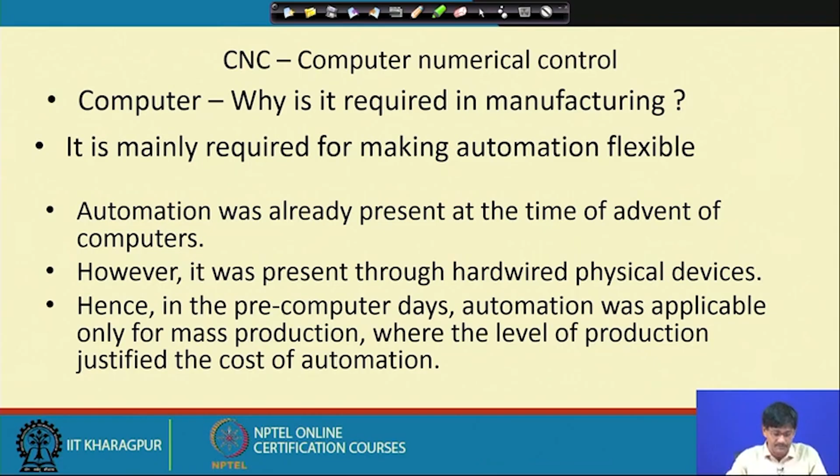Hard automation was restricted to mass production, but computers made it possible to implement automation at lower levels of production, meaning where the number of similar components produced is not very high. In the pre-computer days, automation was applicable only for mass production, where the level of production justified the cost.

Let us move to the next slide, an example of hard automation. This is a physical device called a cam. The cam is rotating and has a non-circular profile, so the changing radius applies a push on this follower, which pushes the cutting tool.

The cutting tool has a straight line linear motion dependent on the rate of change of radius with angle. If this is an Archimedean spiral, the cutting tool gets constant velocity forward motion when given uniform circular motion, meaning omega is constant, so the feed forward motion is at a constant rate.

Once this point comes after rotation, the tool will be rapidly retracted under the effect of this compression spring. This is called the guide, this is the follower, and this is the push rod passing through to the cutting tool, with the cam being the main device for this mechanical, fixed automation control.

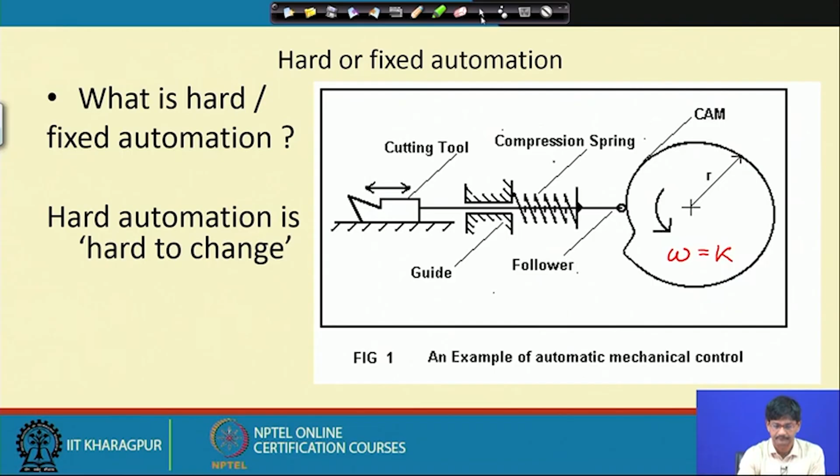So I have tried to just show, movement-wise, how this will look. Let us have a look. Not very accurately shown, but still, something like this. This non-equal radius pushes it out, and suddenly it retracts back very fast when this point comes.

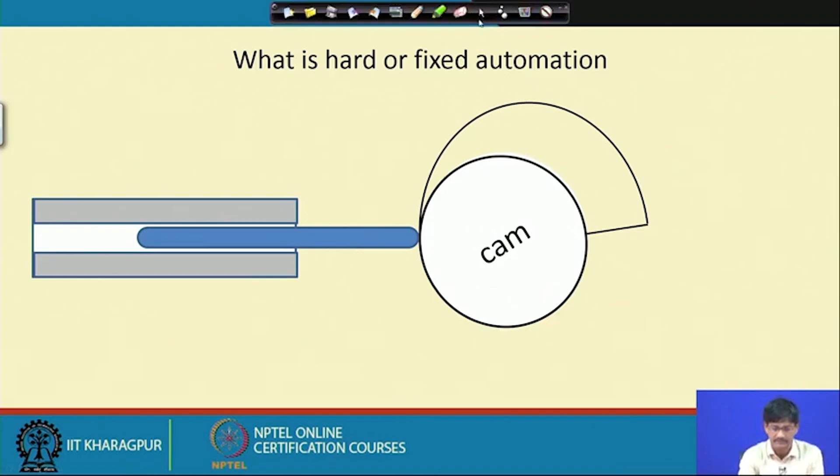So, to proceed, this is an example of what goes inside the CNC machine, and this is an example of point to point control. So I will just write it down here for your reference. Example of point to point, it is called PTP, point to point control.

And this also is in open loop mode. So open loop, I will write here open loop. Example of open loop point to point control in case of a computer numerical control device.

So in these cases, whenever we come across such examples, it is best to identify the prime mover. The prime mover is called something, a stepper motor. What's the property of the stepper motor? The stepper motor is able to move by steps, by angular steps, corresponding to pulses it receives from the pulse generator.

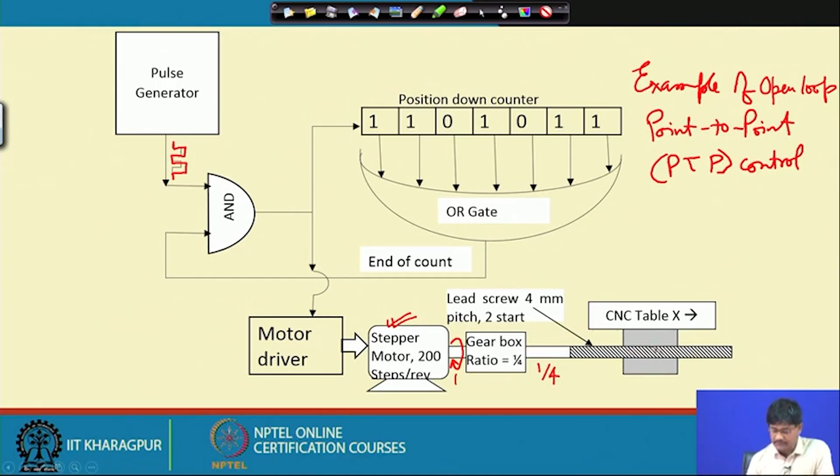This goes round once for 200 such steps. So this goes round and this enters a gearbox with a ratio of 1/4, which means that if this rotates once, this will rotate 1/4. And this lead screw has some pitch, so that this CNC table will be moved forward or backwards depending on the direction of rotation of the lead screw. So this will be moving corresponding to these pulses. So this is the basic control achieved here.

So if I change the frequency of the pulses, the speed of the CNC table will change. If I change the number of pulses going through and ultimately reaching the motor, the extent of motion will be controlled. If I control the sequence, the pattern of pulses coming out from the pulse generator, then this will be either moving this way or that way. So many possibilities of control are there.

Last of all, if I put a number here, this is called a position down counter, it's a digital device. If I put a number inside these slots, and if I take out their extensions and put it through an OR gate, unless and until all of them become zeros, the output of the OR gate will never become zero. So say all of them are zeros at a point in time. So this output will be 0 and it will stop further pulses from coming to the motor.

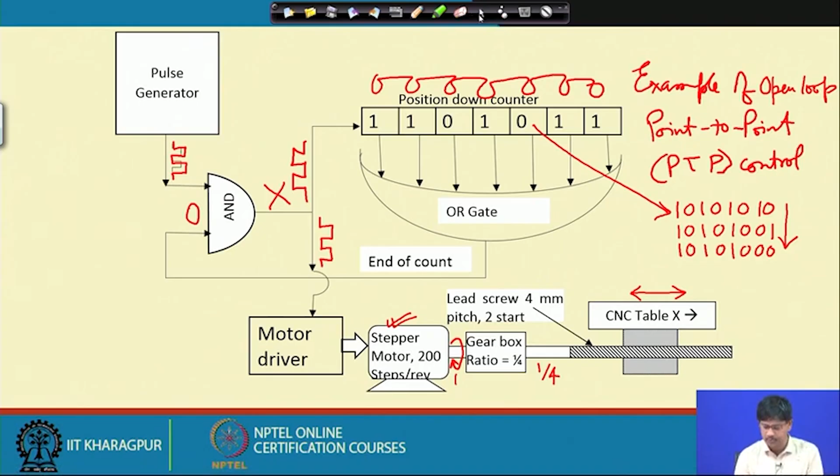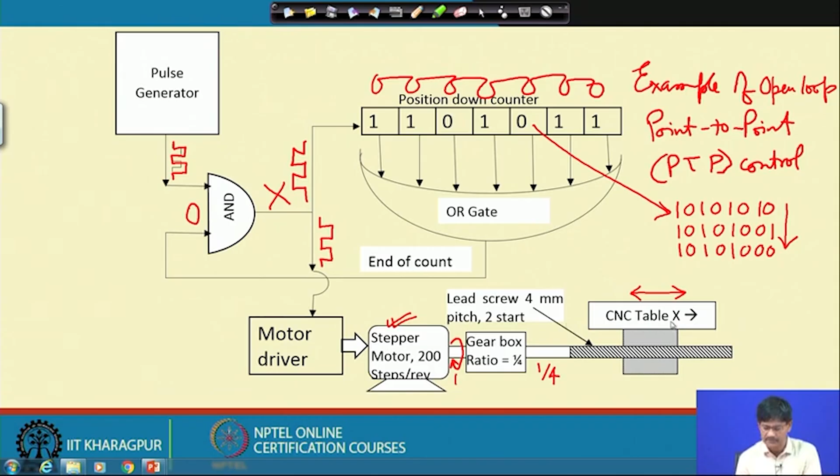So this is called point to point. There is no velocity control as such. Whatever is the pulse generator output frequency, the CNC table accordingly moves with a constant frequency, a constant speed. But why would we want a constant speed? Say you are drilling. If you are drilling, you are putting a job on top of this, and this moves to a particular point and the drill comes here and it makes a hole here like that.

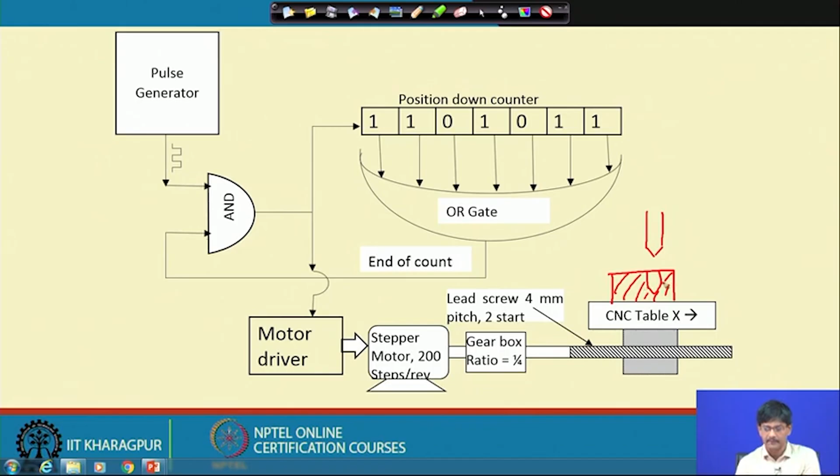When you are drilling, you are really not interested in controlling the speed. You should move at a reasonably high speed and achieve attainment of a particular location where drilling is to take place. So this point to point control is very suitable for drilling, for spot welding, for jig boring, like that.

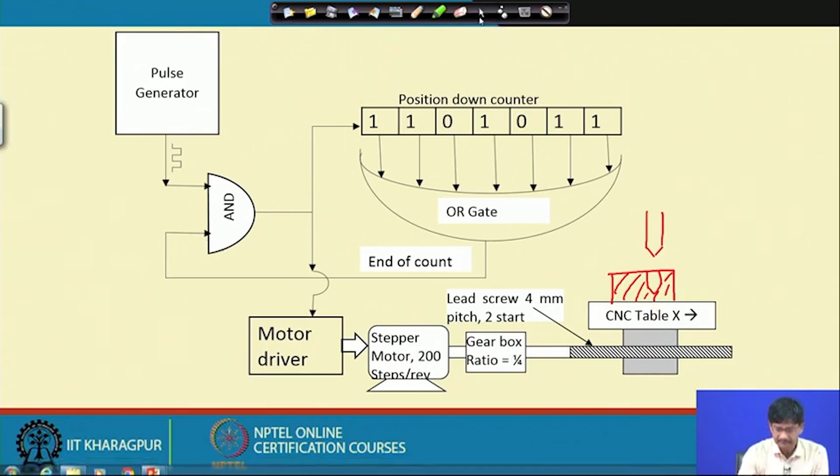Next, this one control is used for a little more sophisticated type of machining operation, that is, say, milling, lathe, like that. So what is this? Let us identify once again the prime mover. Where is the prime mover? Yeah, here it is.

This is the prime mover, the motor. Here maybe it is a permanent magnet DC motor, etc. Let us not be bothered about the nature of the prime mover. This is the prime mover. And where are the pulses which were previously there? The pulses are still there. They are coming from a device called interpolator.

The interpolator basically controls the velocity and the ratio of the velocities along the different axes for a table, CNC table, say milling machine table. That pulse position down counter is still there. Position down counters basically control the extent of motion. Okay, this will be controlling the extent of motion.

Who controls the speed of the table? The pulse frequency will be controlling the speed of the table. So pulses come here.

Position down counter again controls through that OR gate, collectively taking all these values out, and when they are compared, when they are ANDed with the interpolator pulses, if this is 0, interpolator pulses are stopped. But suppose they are let through, then through this up down counter, this is called up down counter. It can count up as well as down. This can only count down.

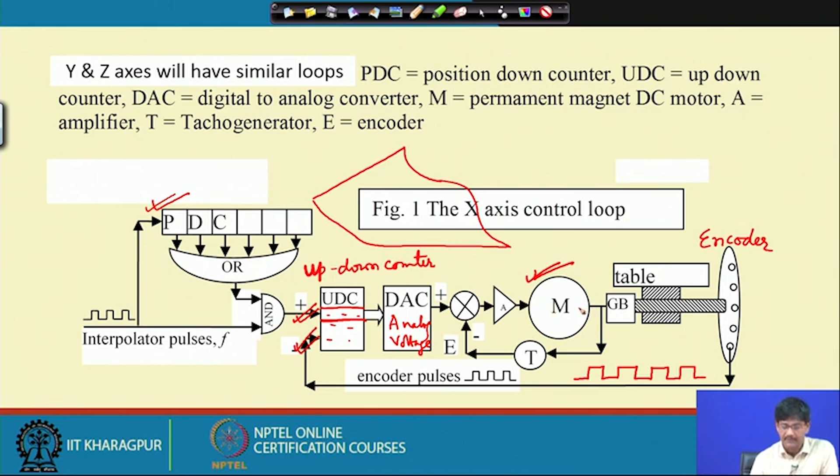Just now what we discussed about constant rates coming in and going out was for cutting of straight line cuts. At that time the motor is supposed to move at a constant speed. Okay, so let us move on to the next concept.

So in this way what we find is the CNC, the conventional machine looks like this. Remember, one single motor in the milling machine supplies us this longitudinal motion, transverse motion, and the vertical up down motion, and also the cutter rotation. Cutter has not been shown.

However, in case of CNC, what happens is each of the axes is controlled separately to achieve absolute control over each and every axis. Now what is the advantage here?

The advantage is this, that on the conventional milling machine we are cutting different profiles by combining the motions of these different axes, and immediately we have a disadvantage that whatever options are given by the gearboxes, only those options we can have. Maybe the cross feed and the longitudinal feed, if we want definite ratios to be existing, we can only look up the gearboxes and find out what are the different options, different combinations which are possible.

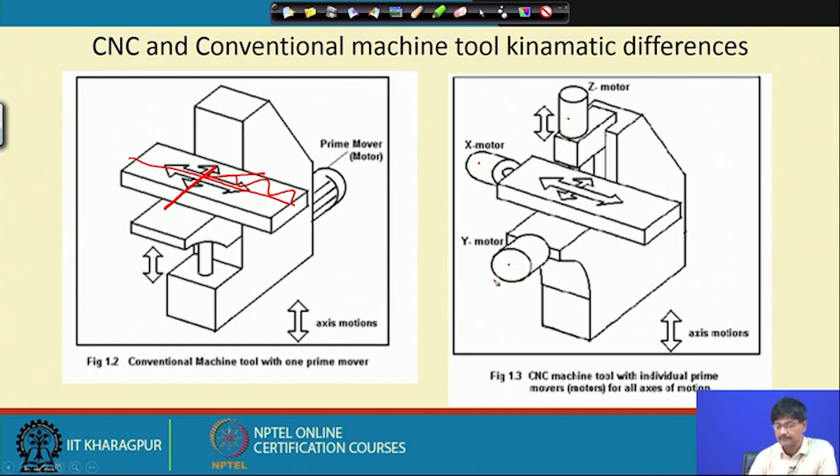But suppose I want a different option. Suppose I want, instead of moving the cutter in this direction, I want to move the cutter in this direction. How do I do that? So in that case, I can have individual motors for each and every axis and control them from the computer directly.

So that if I want a circle to be cut, I can give a voltage to the X motor as V sin omega t, and a voltage to the Y motor as V cos omega t, and their combination will give me a circle if the speeds correspond, in a similar fashion to the respective voltages applied to the motors. So by this method, I can cut practically any type of profile that I want without the help of physical devices, but by directly controlling the input voltage from the computer.

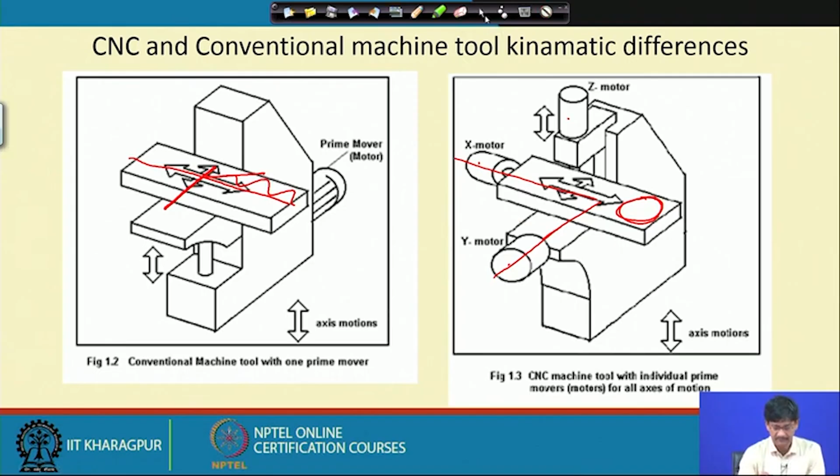So these are some of the parts that we have cut by computer control. See these profiles. If you give this to an operator of a manually operated machine, you know what he will say? He will say, this is very difficult. I am going to charge you 5,000 rupees in order to cut this, because I have to draw this profile very accurately on the plastic part and then cut with great care.

And you have to pay me 5,000 rupees with an advance of 500 rupees now itself. Okay, similar thing. But what we did was, we simply made a program for the cutting of this one, and the tool was automatically guided all through by the program. How was this done? Corresponding to each and every movement, the interpolator sent a different pattern of pulses to the circuit which was controlling the movement of the table, and accordingly it was done.

Everything was done automatically. What is this one? While these are two-dimensional jobs, this is a three-dimensional job showing definite ups and downs and a smooth surface on the top. So we can cut 3D surfaces as well by computer numerical control without the help of any fixed hardware circuits or physical devices.

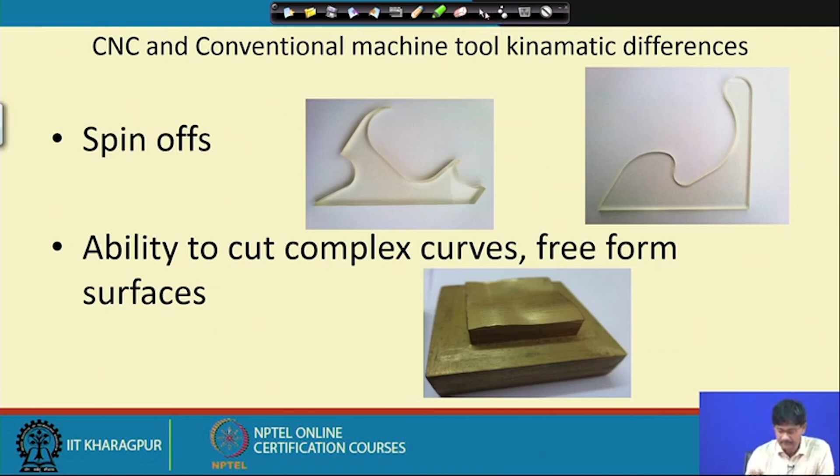This is a device which we use in case of CNC for removal of sliding between moving parts and stationary parts. If there is sliding for very slow motions, there can be stick-slip motion, which will totally spoil the motions in the slides and guides of CNC machines, and this is called a recirculating ball lead screw nut mechanism. If I get a chance, I will try to provide you with some notes on this one.

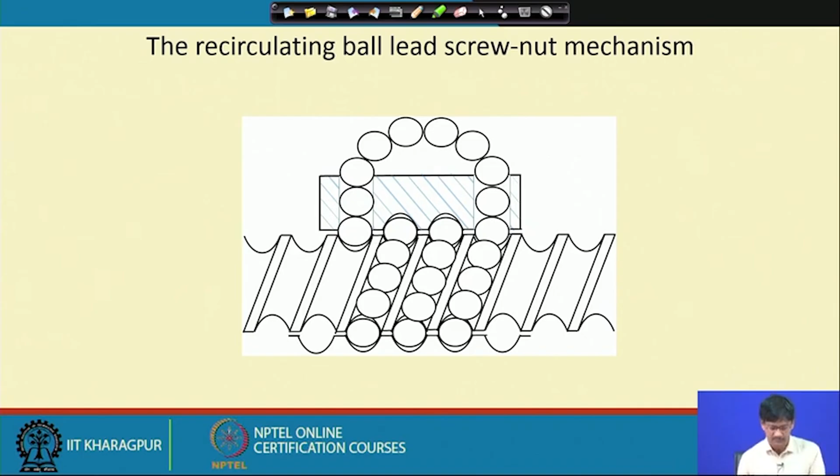So as time is short, I will summarily move on to some of the non-traditional material removal methods. Non-traditional material removal methods are used when traditional methods are impossible to implement, or the material of the workpiece does not allow the application of conventional methods where heavy forces would be involved, or the shape of the work material is such, or its size is such, that conventional machining methods cannot be applied.

So in these methods, typically we find that material removal rate might not be very high, but the feasibility of the process is the telling factor. It is the ultimate deciding factor.

For example, if you take ultrasonic machining, what does it mean? It means that instead of using a cutting tool on a workpiece, there are some workpiece materials which do not allow conventional processes to be carried out. What are these? Say, I'll give an example, glass. Can you machine glass on the lathe or on the milling machine? It will fracture simply.

If I want to machine glass or some other ceramic material which is extremely brittle, instead of having a heavy, large cutting tool trying to remove material and incurring fractures, I will make use of a very small cutting tool. I can have abrasive particles used against the workpiece, so that fracture is minimized and material removal is made possible without macro fracture lines existing on the workpiece.

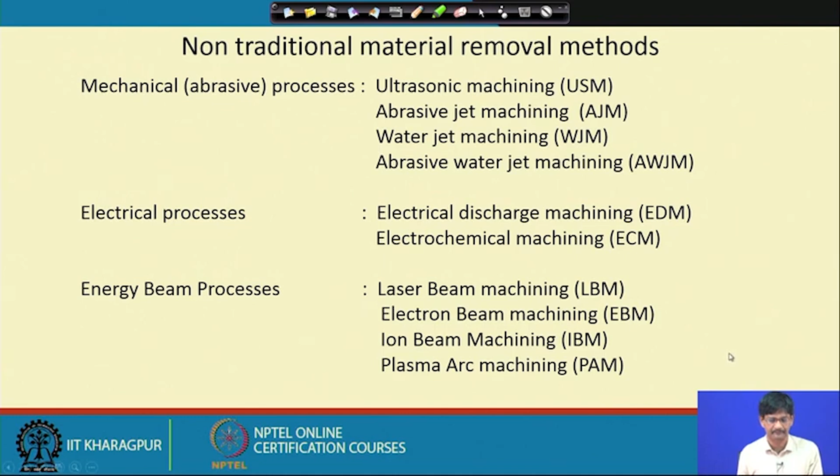Let us go on to discuss these in more detail. The ultrasonic machining method first has a transducer where electrical energy is converted to mechanical vibrations. These vibrations have their amplitude increased.

The amplitude is multiplied by this device called a horn, by its very shape. When the horn vibrates, it creates a high amplitude of around 25 microns at its end, where we fit a tool of a definite profile against the workpiece. This is the workpiece, which is typically glass, ceramics, etc.

We press this against the horn by applying a weight here, using a common balance, and we put some abrasive slurry - a liquid like water carrying abrasive particles such as aluminum oxide or silicon carbide, very small particles of about 10 to 50 microns in size. This vibration setup causes a hammering action, so that the abrasives are impacted against the workpiece by this hammering action, and they remove material in this way.

The abrasive particle, idealized as a sphere, hits the material of the workpiece this way, and fracture takes place. We assume that fracture occurs in brittle materials as a hemisphere getting removed - this particular part is removed as a hemisphere. This is the abrasive grit.

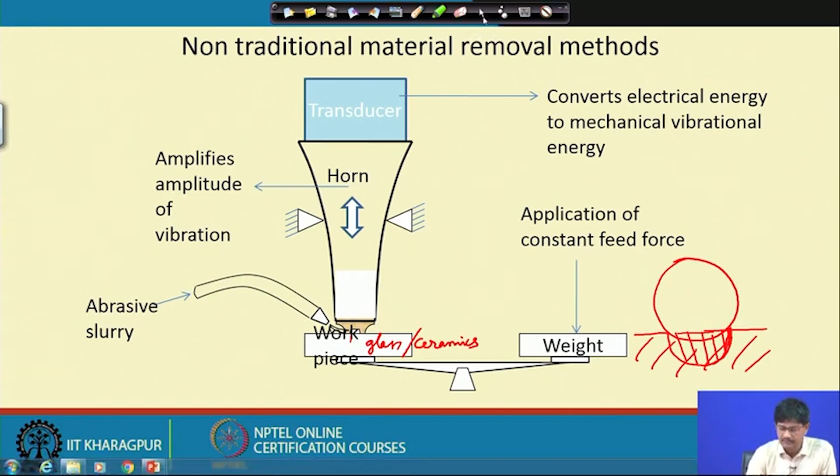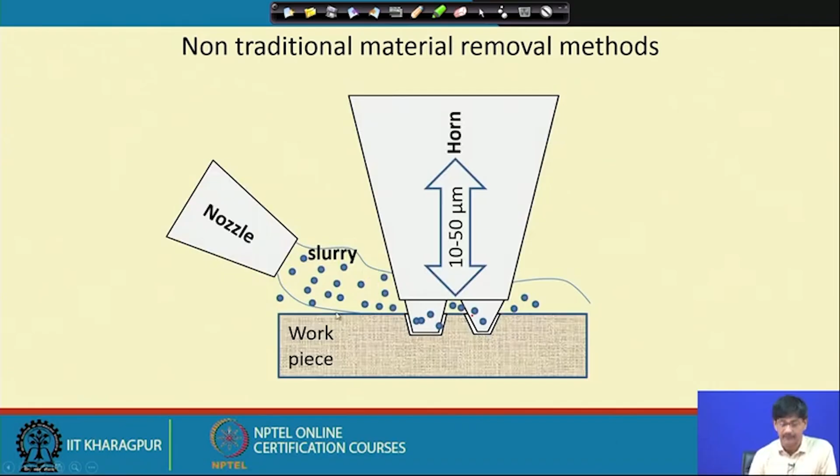Let us move on to see further details on this process. This is a slightly magnified view. All the details that we discussed are shown here, and this is how it operates. Can you detect a very small amount of vibration of this tool? This is what happens, and the actual frequency is even higher than what I have put in here.

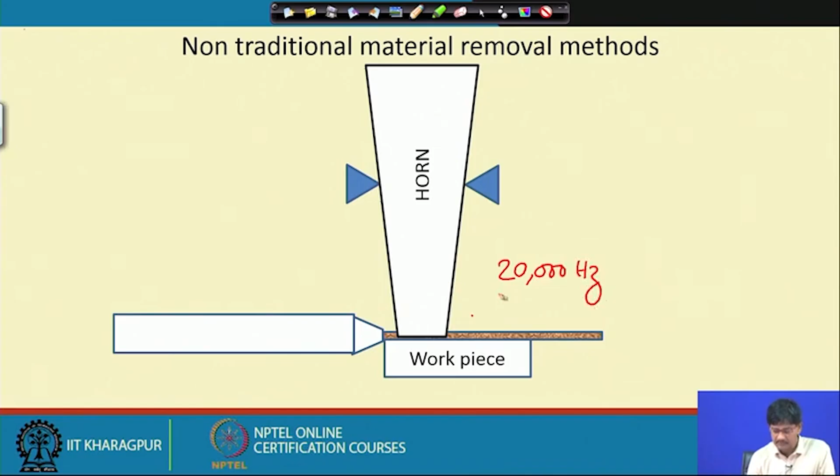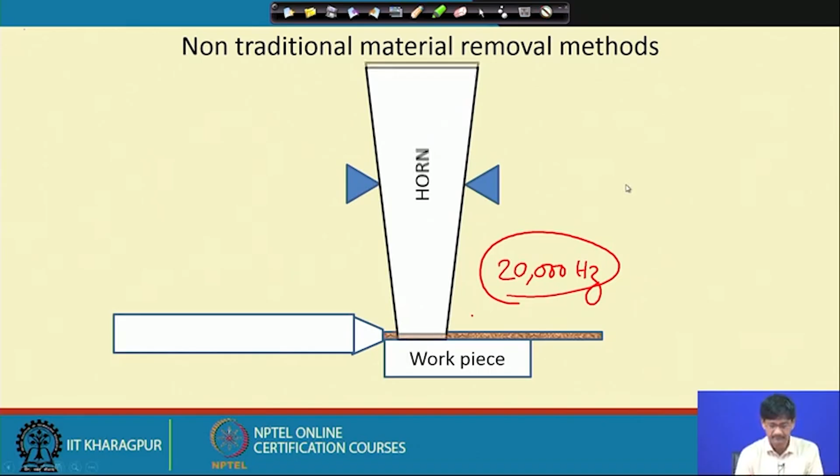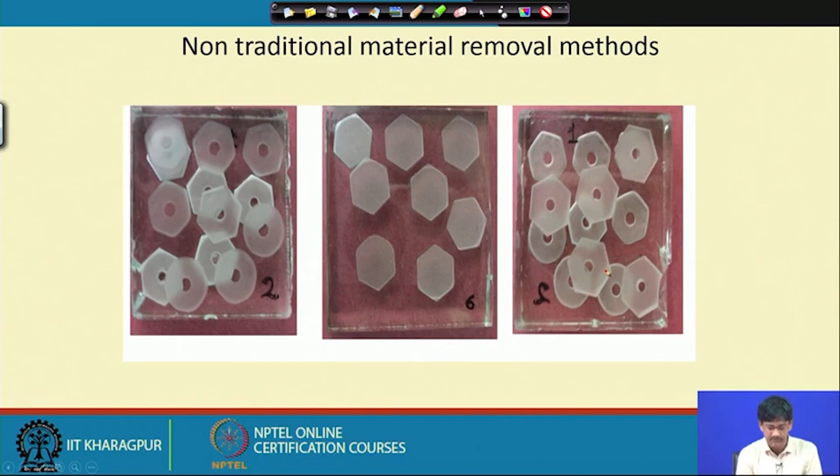This is the abrasive slurry which came out - it goes on and on, put in here by a nozzle, and this tool is vibrating at typically 20,000 hertz - 20,000 times per second. So many impacts are taking place, with the abrasives put in between. These are some of the impressions of the tools we have used in USM on glass pieces.

Abrasive jet machining: a nozzle here is shown throwing abrasive particles against a workpiece. What's the speed? Speed is 150 to 300 meters per second. And how are they carried? They are carried on a gas jet.

What are the typical abrasives used? Al2O3, silicon carbide, aluminum oxide, glass beads - their size range is 10 to 50 microns. Applications include cutting, drilling, and micro machining of brittle, non-conducting materials like glass, ceramics, semiconductors, composites, and heat sensitive, fragile materials. So this is abrasive jet machining.

One very common application of abrasive jet machining is that suppose there is a pipe and internally there are some burrs sticking and creating an obstruction to some sort of flow intended through that pipeline. An abrasive jet nozzle can be put inside that pipe to remove that burr extending inside the pipe, which other processes cannot practically carry out.

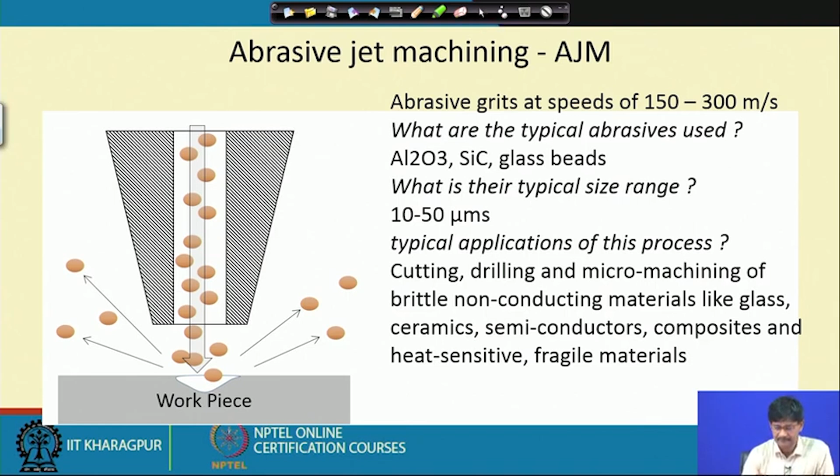This is the setup of an abrasive jet machine, which shows the simplicity of the process. You simply need a gas cylinder, and from the gas cylinder there is a pressure relief valve, dryer, air filter, etc., to the mixing chamber where abrasives are put into the air stream, and out it comes through a nozzle, and there is a workpiece which can be manipulated under the jet, and whatever machining is required, it can be obtained.

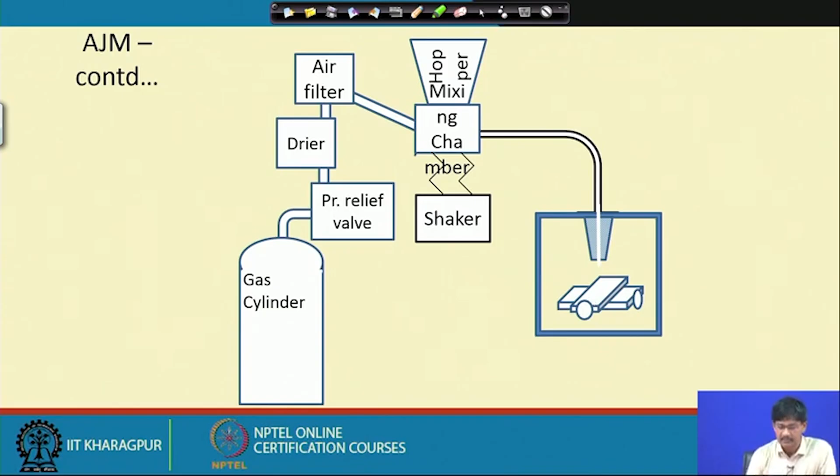However, this is restricted by the low MRR obtained in such a process. In case of water jet machining and abrasive water jet machining, it's much more versatile than ultrasonic machining and abrasive jet machining. In what way? The abrasives now coming out are at almost 1000 meters per second, and they have the ability to cut practically all materials, not only brittle materials.

Cutting rates in abrasive water jet machining and laser beam machining: both can cut practically all materials, but laser beam machining has become much more accepted due to its versatility and also its ability to cut very hard and tough materials. For hard and tough materials, abrasive jet machining is not so appropriate.

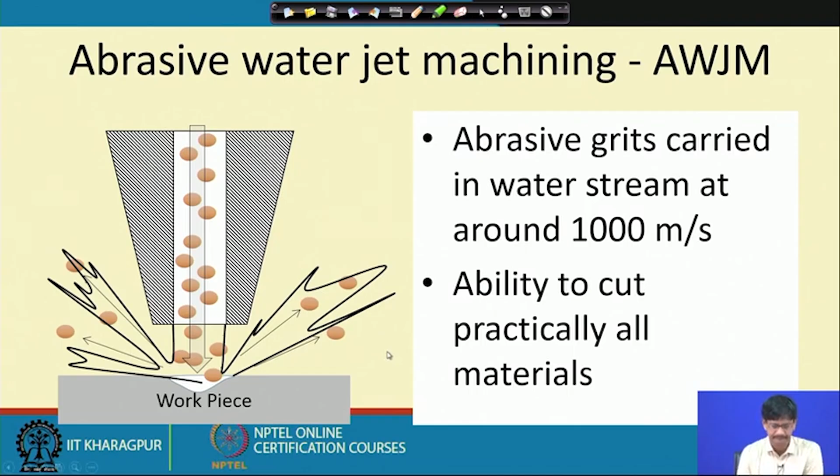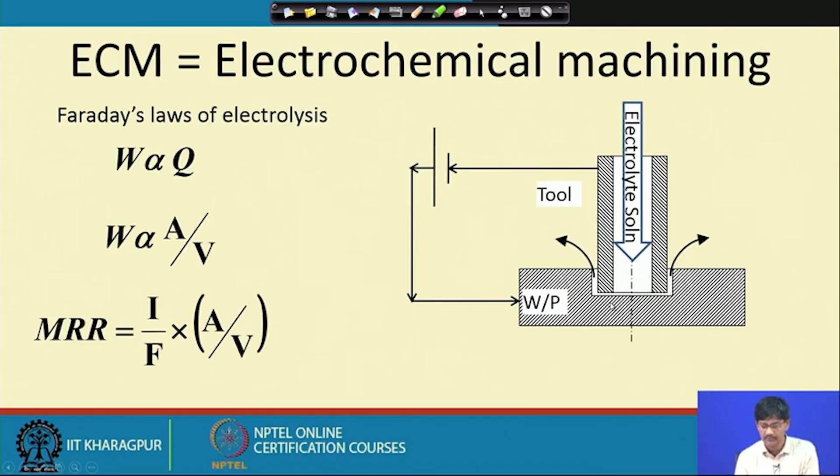Electrolyte solution is coming in. This is the tool or the active electrode, and this is the workpiece. It's given anode connection and this is given cathode connection, and due to electrolysis, as the tool moves towards the workpiece, it selectively dissolves this portion of the workpiece so that material removal is achieved together with a certain profile being given to the workpiece.